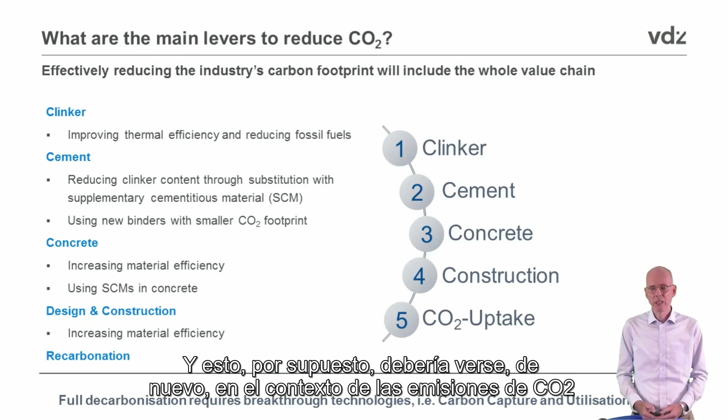Now, how can we reduce CO2 along the value chain? You're all familiar with this, nothing new for you. In our hands we have clinker and cement, so we focus on clinker and cement production. But along the value chain, the question is: how can we use concrete with higher material efficiency than today? How can we further use SCMs in concrete? And how can design and construction contribute to increased material efficiency? This is also to be seen in the context of reducing CO2 emissions for construction.

Finally, and you all know about this, recarbonation plays a major role. It is now going to be accepted on an IPCC level, and recarbonation will take its place in the carbon balance on Earth, in the global carbon balance.

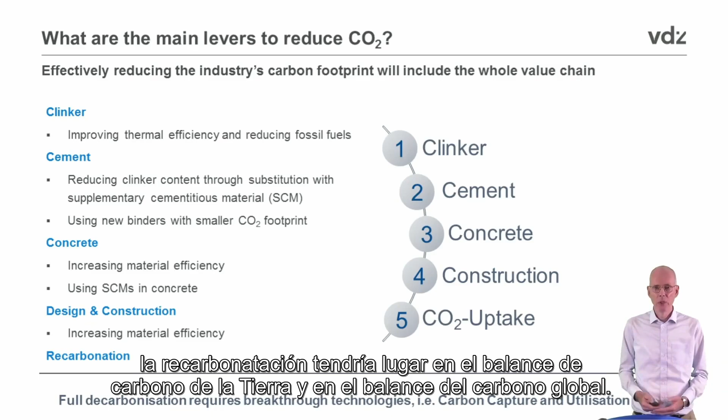Now I'm concentrating on a few of these aspects, but before I do so, as I'm focusing on the technology aspects of clinker and cement production, I would like to draw your attention to the ECRA technology papers that we developed together with CSI a couple of years ago and have updated since. You'll find all the technologies important today in our industry in these papers, as well as upcoming technologies that can develop in the time to come. It's really worth reading these documents.

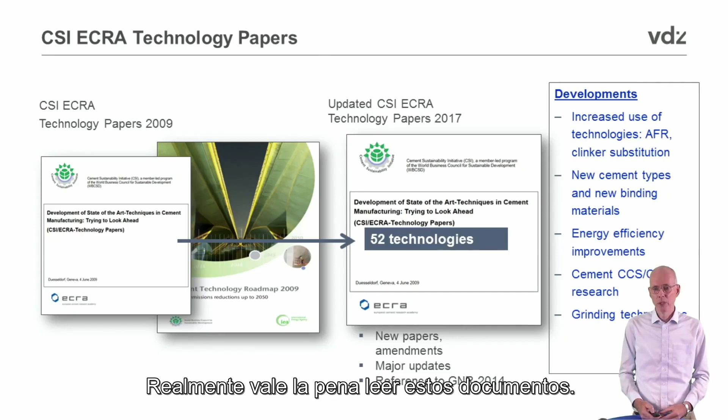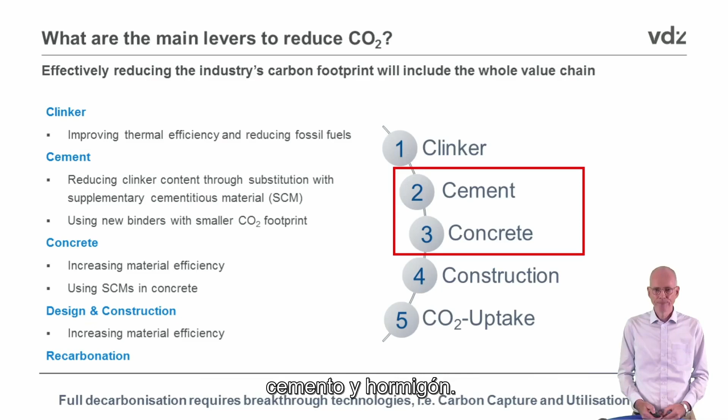Now let us first concentrate on the aspect of cement and concrete before I go back to clinker production. These are the points I would like to concentrate on in my presentation today. Cement and concrete: the question is how can we produce, in the time to come, cement with optimized clinker content, and how can we produce concrete with optimized clinker content? It's the same question put differently. The question finally is how can concrete be used efficiently in construction?

I'm not going to touch upon all of these aspects here, but I will highlight a few of them. The most important thing I would like to emphasize is that this is a unique process we are going through in the time to come, and it really requires good cooperation along the value chain. It's not fully in our hands.

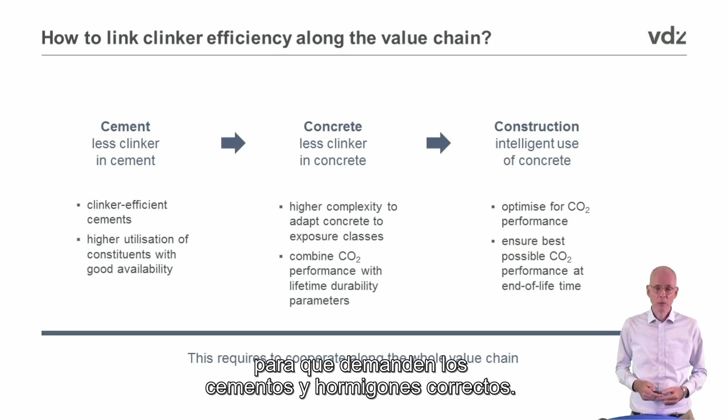So we need our downstream users to participate, and we also need a framework from governments, for example from policymakers, but also from society to deal with this, to make this happen, and finally also to buy the respective cements and the respective concretes.

Now let me draw your attention to cement first. I'd like to give you an example of our European situation, in which we have a cement standard called EN 197 Part 1. What you can see in this triangle is one example of what we call the ternary cement. It consists of clinker, slag, and limestone, and each corner represents clinker, slag, and limestone respectively with the corresponding letters. On the left side you see the slag cements in orange.

These slag cements are well known and well established in our industry. On the bottom you see the limestone containing cements, shown in blue. You all know that limestone content in cement is limited for very good reasons, differently from slag, for example.

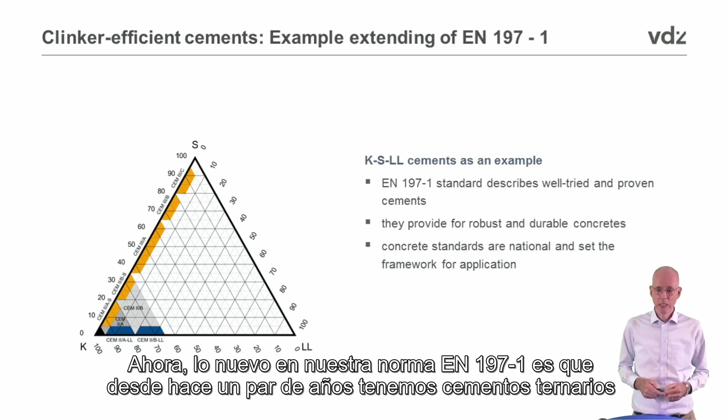Now, what is new in EN 197 Part 1 since a couple of years is that we have ternary cements which contain both slag and limestone. It's not the only combination possible - other combinations are possible as well, but I'm concentrating on this one as an example.

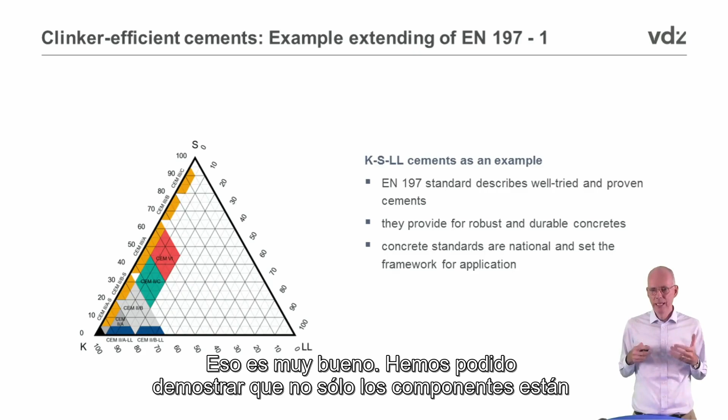Now we have the possibility to enlarge this standard, and it has recently been published. So we have new cements in our European cement standard which have higher concentrations, as you can see here, of limestone. That's very good, and we've been able to prove that not only the constituents are well tried and proven, but also that the concretes are robust and stable.

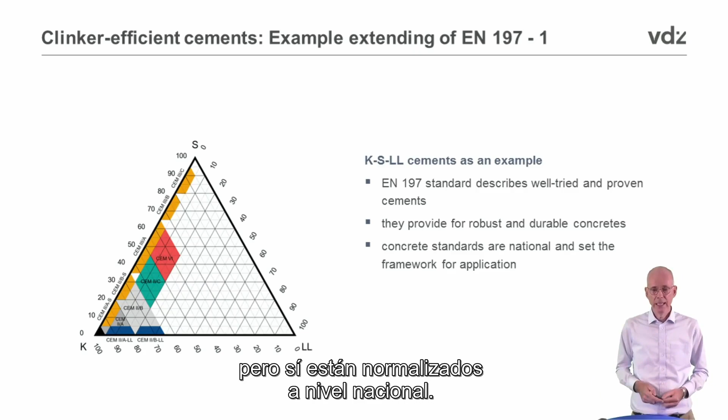Nevertheless, it still requires, of course, the national concrete standards to be adapted, and you should know that concrete standards in Europe are not harmonized all over Europe, but are standardized on a national level.

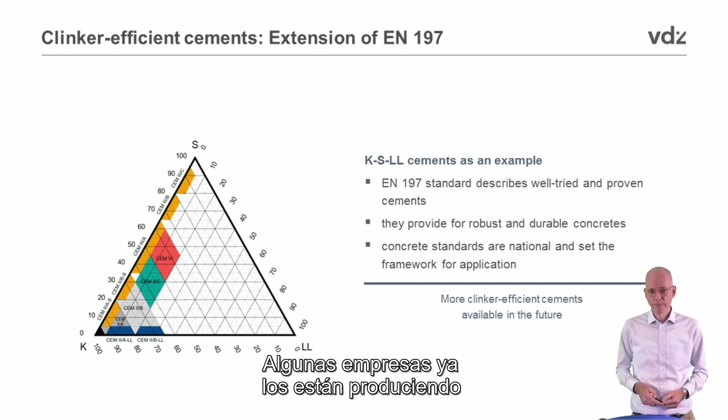So these cements are available right now already - clinker-efficient cements which we did not produce in the past and which, of course, were not able to be used in concrete, but they are available in the near future. Some companies are already producing them. And of course we have to make sure that concrete standards allow for their utilization.

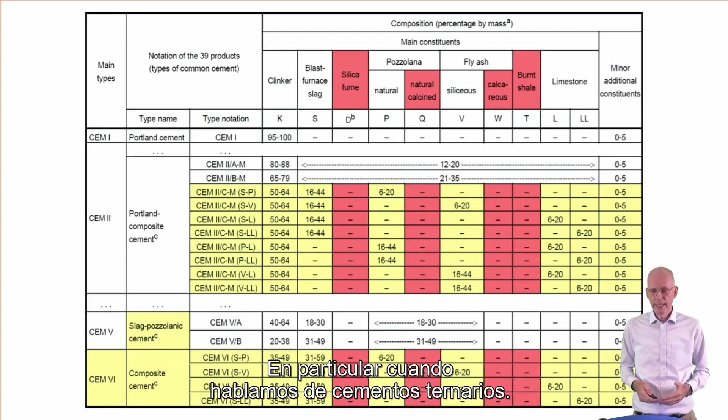So I will not bore you with too many details and tables from that standard, but what you can see in the upper part are the main constituents. Beside clinker, you have all the main constituents you know, from blast furnace slag down to limestone. So far, all these main constituents were in the standard, but not for each of these cement types. The ones in red were still lacking focus, in particular when talking about ternary cements.

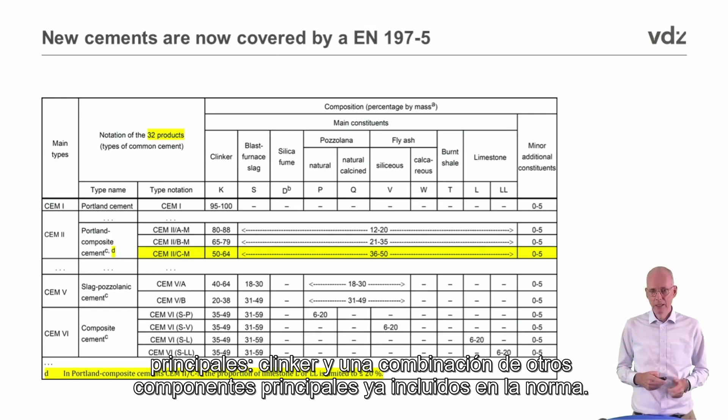And that has all been broken down to cements, which you can see here as so-called CEM II cements, for example, which now have a composition of three main constituents, namely clinker and a mixture of the other main constituents as they are laid down in the standard. So it's a great opportunity for our industry to build on this and to make sure these combinations as ternary cements can be used in the future.

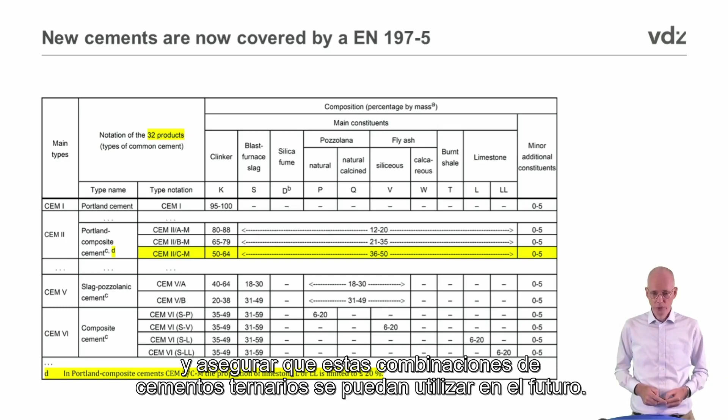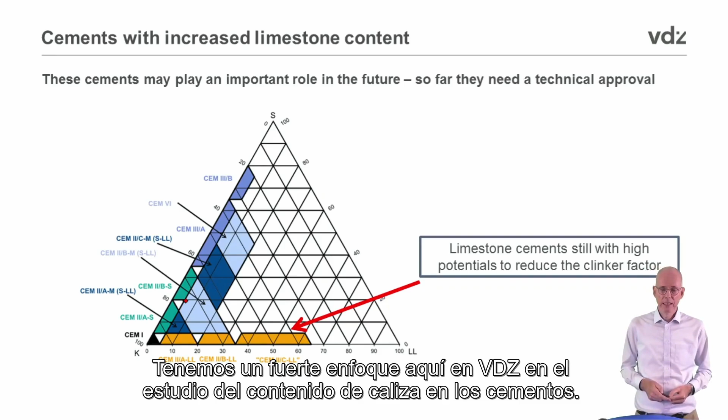Is there further development beyond this, beyond these cements which are already standardized at this point? The answer is yes. We have a strong focus here at VDZ on limestone containing cements. When I talk about limestone containing cements, I'm talking about limestone contents of up to 50%. We all know that limestone, of course, is only to a small degree reactive in our cement, different from pozzolans or, for example, slags. So we've been focusing on this, and it clearly shows that these cements have a high potential.

It's not only the limestone content, but it can also be combined with other two materials, like slag, for example, in this example, or with clinker. And of course the possibility for cement producers to produce these cements is there. Again, it needs the adaptation of the respective concrete standards.

And this requires some careful thinking, because these cements cannot be used under all conditions. We know from our traditions that most concretes are made in order to fit for any purpose. And this, I think, is something that has to be changed and adapted in the time to come.

As we all know, there are concretes for dedicated applications which require good strength development and maybe protection against carbonation, but that's it. In countries like ours, where we have frost, for example, and de-icing salts, these are dedicated applications where such cements should not be applied. But for most other applications, these cements can be applied, and this is what we are building on.

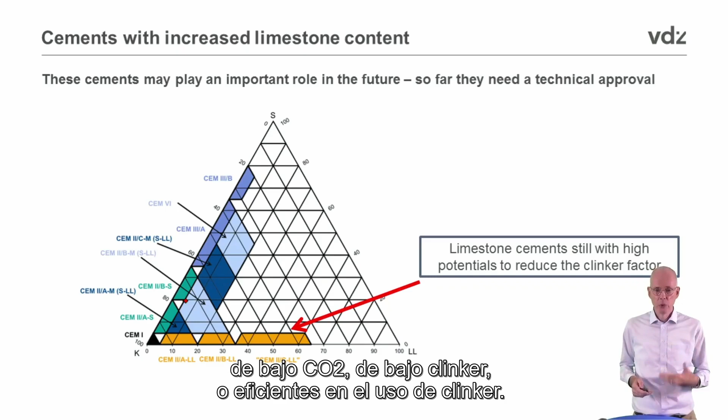With this customized approach to cements in concrete, we have great opportunities to bring these low CO2, low clinker, or clinker-efficient cements to the market.

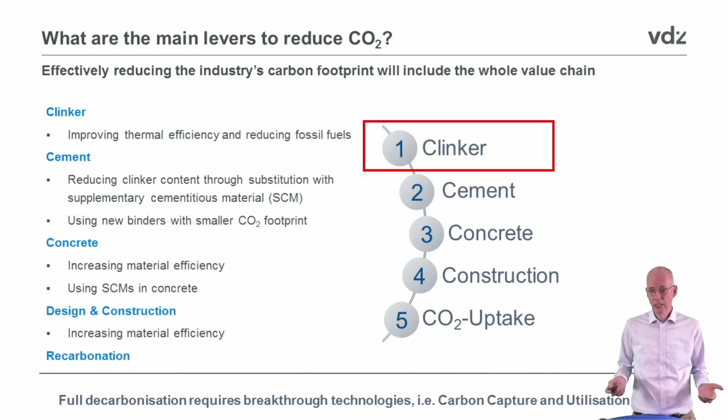Now let's have a look at clinker, which is the heart of our value chain, with our kilns, the big investments, and the question of how we can reduce CO2 from clinker production. You all know we have a couple of possibilities here.

One pathway is to utilize alternative fuels, including alternative fuels with biomass. Here's an example from our own industry in Germany, showing the substitution rate of alternative fuels. We are almost up to 70% substitution rate on average for our country, with a couple of our kilns operating close to 100% substitution rate on an annual average basis.

How did that happen? It started already in the late 1980s, with used tires, but also with PCB-contaminated oils in 1990. The government asked the cement industry at that time whether it would be willing to incinerate these PCB-containing oils. The industry was hesitating, but they made it happen, and that was a big breakthrough because it was full proof of the destruction of these persistent organics.

That was very good, because it was developed together with the government in the 90s. Later on, other wastes were also used, like industrial waste from defined origins, which need to be pre-treated. What was helpful in these days was the waste landfill ban.

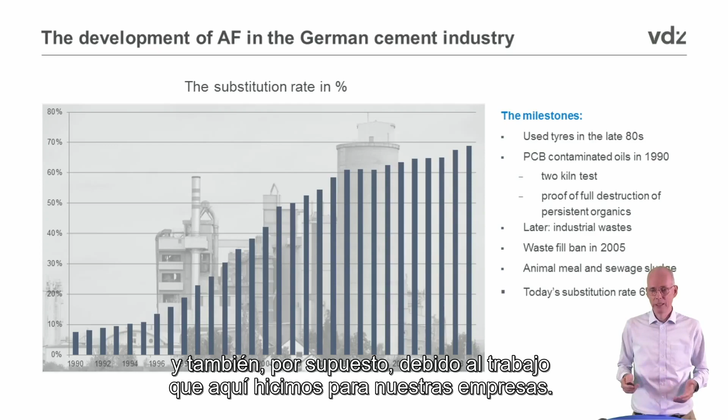Utilizing alternative fuels with sufficient biomass is partly reducing our CO2 emissions, for good reasons. But it only affects the part from the fuels. As you know, we have CO2 emissions from the calcination of our limestones, which accounts for two-thirds of our total emissions.

We've been working here at VDZ together with ECRA, the European Cement Research Academy, for many years on the question of how CO2 can potentially be captured at a cement kiln. We have been focusing on two technologies: the first is called post-combustion, and the other is called oxy-fuel technology.

Post-combustion is a tail-end separation, meaning you basically have a scrubber at the end of your kiln. It's energy intensive compared to other technologies, but it's well tried and proven in other sectors. An important project here in Europe is going on at the Norcem Brevik plant of HeidelbergCement, with other prototype testing underway.

Oxy-fuel technology is slightly different. You operate the kiln without combustion air, using pure oxygen instead. In theory, if the kiln is nicely sealed, you have a high percentage of CO2 in the flue gas, which is much easier to process. Processing means you clean it, dewater it, dry it, and at the end compress it so you have CO2 in a liquid state.

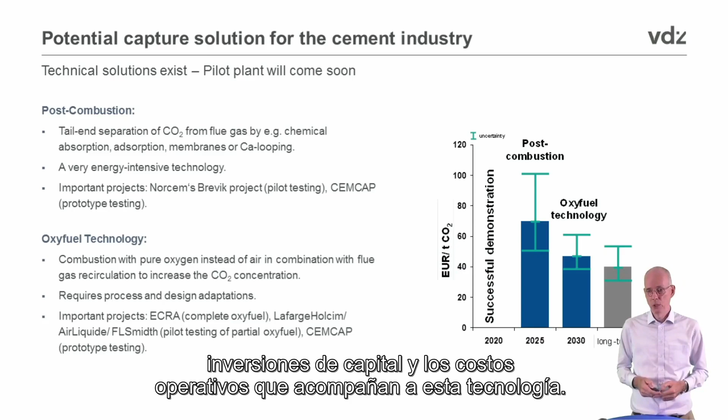On the right-hand side, you see a graph giving a feeling of the cost, and these costs don't yet contain the costs for further processing of the CO2 or for storing it, because that's the big question: what to do with the CO2 at the end, beyond the high capex and operational costs that go along with this technology. There are a couple of projects to be mentioned here.

When we talk about oxy-fuel, the first generation oxy-fuel project has been developed, and the first kiln is now being set up as a pilot kiln in the southern part of our country. It's actually already the second generation of oxy-fuel technology. You may wonder why it's a second generation - there are some subtle differences or details which equipment suppliers were able to overcome. Now these kilns are much smaller in size for the same capacity, with much less equipment, though with other challenges of course. But it's a very nice development of what was developed here a couple of years ago, in particular by the European Cement Research Academy.

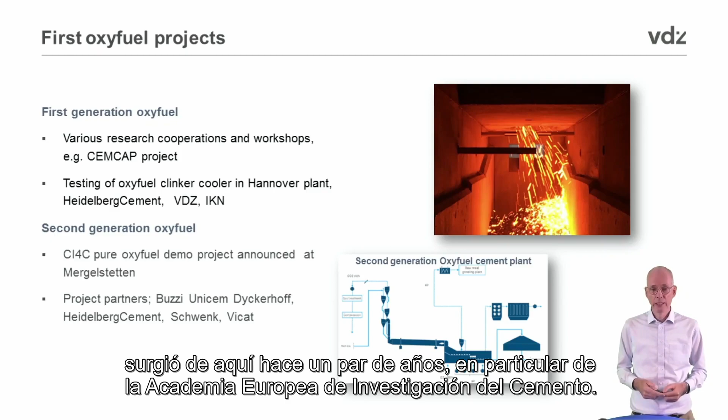Now, post-combustion projects - a couple of them are available and have been announced. The most famous one is the Norcem Brevik project. It started some time ago, and the idea is to capture the CO2 and transport it to depleted oil fields in the North Sea, which is very convenient since the plant is next to the coastline, making it easy to transport the CO2 by boat or pipeline into these depleted oil wells.

Another project is going on in northern Italy. It's integrated calcium looping, which is slightly different. What you do is use the calcium oxide that develops in a kiln as an absorber for CO2. Once you recycle it, you end up with a CO2 stream that is quite pure - meaning very high CO2 concentrations, which of course makes the capturing, or further processing, highly efficient.

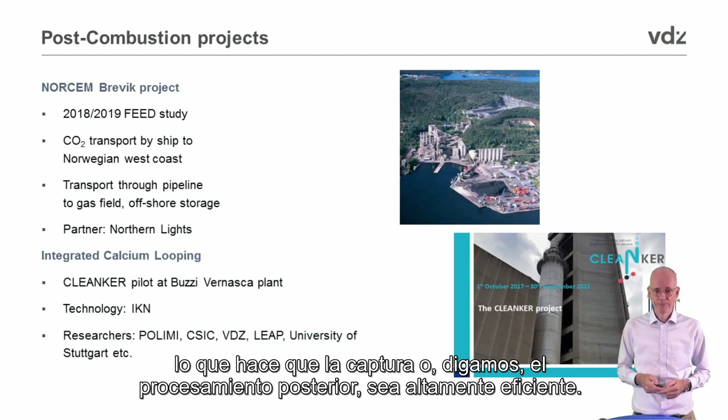Another project focuses on the utilization of CO2, which is the second big thing besides potential storage - namely utilizing the CO2 for something, for example in the chemical industry, or as synthetic fuel for the airline industry. This project has been announced in cooperation with wind energy providers, who take advantage of excess wind energy when the wind is blowing and electricity demand is not high enough to utilize all of this energy. Part of the setup is also a refinery in which this CO2 and hydrogen are made to react to, for example, methanol or kerosene as synthetic fuel, or other base chemicals for the chemical industry.

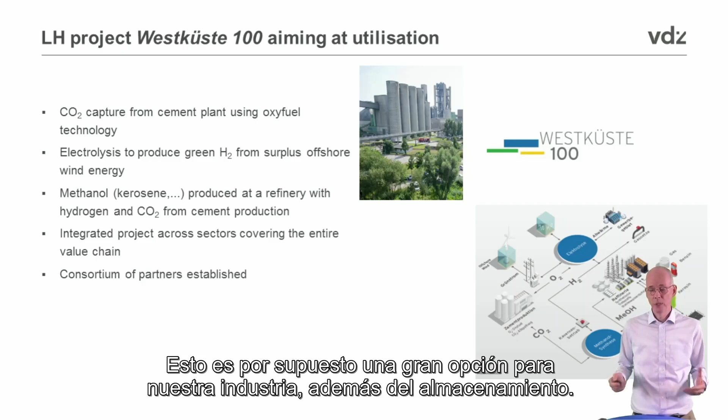That clearly shows that when we're able to combine this with other sectors which have a need for our CO2, or which can provide renewable energy at good cost, then there is an opportunity to utilize the CO2, which is a great option for our industry besides storage.

Now, coming back one slide here with respect to storage - I think the situation will be similar in many parts of the world, but I'm concentrating on Europe because that's the area I know best. There's quite a bit of testing, exploration, and studies going on to understand where CO2 can be stored. This requires first of all knowing exactly the sources, but also the question: what kind of infrastructure do we need?

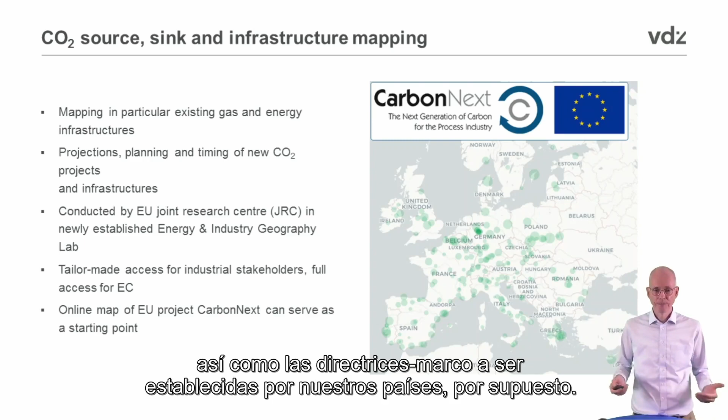The European Commission has a strong focus on this, and many cement producers are participating to make sure a good infrastructure for CO2 and also for hydrogen can develop, which is necessary for our industry to utilize carbon capture technologies. It doesn't make a difference whether it's for storage or utilization - we need an infrastructure, and this is nothing the cement industry can do alone. We need this guidance or framework to be provided by our countries.

One of the reasons is that not only is there a need to make use of our CO2, but even further, the chemical industry has a long-term interest in basing their value chains on carbon. So far, it's all based on fossil carbon from petrochemical processes.

There are quite a few numbers available, but I'd like to highlight one for all of Europe. The chemical industry in Europe has put together a report stating that for low carbon energy and feedstock, the entire European chemical industry would require almost 400 million tons of CO2 every year. That is 4 to 5 times the amount of CO2 emitted today by the cement industry. I'm saying this to underline that there is a potential for our CO2 to be used.

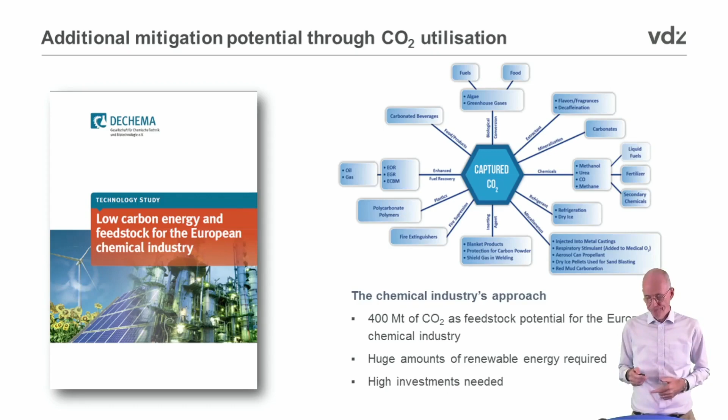Concluding this, I think that as an industry we can effectively reduce the carbon footprint, but it requires that we include the whole value chain. I've been talking today about the clinker and cement part, which is in our hands, but we have other parts where we have to cooperate with downstream users like the ready-mix industry and the precast industry. We have to make sure that embedded CO2 finds its place in construction. So far, this is not the case — there's no pull effect from the market when it comes to CO2 efficient cements.

We have the difficulty in our country that we are able to produce these new types of cement with low clinker factors, but the question is, are they going to be bought by our customers? Therefore, we need this kind of push and pull, or in my words, a strong and trustful cooperation along the whole value chain. It's not fully in our hands, but I think we've expressed the need here to cooperate along the value chain, because this is something we have to do together. We really have to get to net zero CO2 emissions by 2050 for cement and for the concrete sector, and that means we cannot do it without cooperation with others.

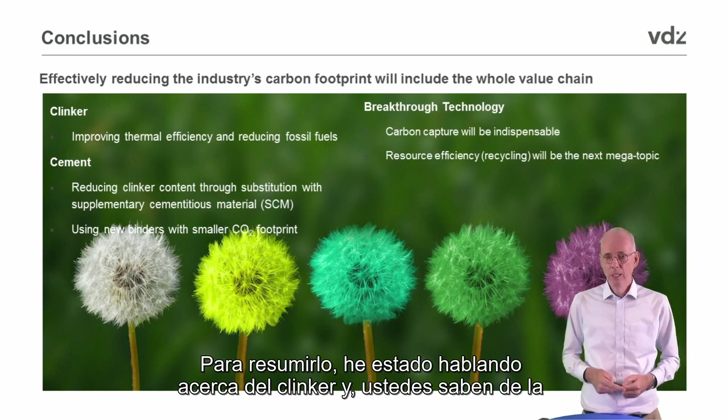Now, I've been talking about clinker. To summarize, thermal efficiency is one thing we've been working on for many years. I've also been talking about alternative fuels, which is state of the art but requires respective waste management in the neighborhood and area of the cement plants.

I've been talking about cement, and that we still have the potential to reduce clinker content further through substitution by SCMs, in particular limestone and slag, but also — and I haven't discussed this in detail — by calcined clay, which we're looking at in great detail all over the world because it's a promising main constituent that can also contribute to cement performance. There are opportunities for new binders, but so far the main focus is still on Portland cement clinker, due to the sheer amount of clinker needed and the possibility to source raw materials locally, such as limestone and clay.

This is most important, and it's a big prerequisite for our value chain, to make sure we have sufficient raw materials for the amount of cement we still need in the time to come.

Finally, I've talked about carbon capture, and I think it's an upcoming technology. It's not easy at all, but in principle I believe this technology can, or must, play an important role in our industry, and it will play an important role. Technology-wise, I think we've understood quite a bit of this technology, and all the parts of it are mature enough to be implemented in our sector. The big challenge is what to do with the CO2 at the end.